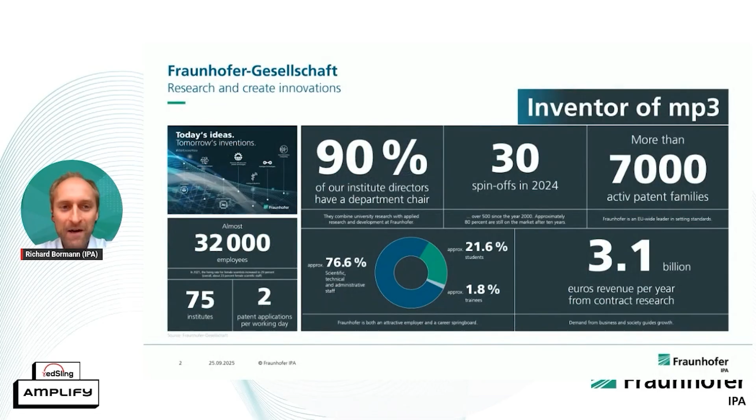We are happy to present our work on virtual feasibility assessment for bin picking today, which is a new paradigm in solving bin picking tasks. And before I really start with the topic, let's say a few words so that you have an idea what Fraunhofer IPA is about and Fraunhofer Gesellschaft as a whole organization is about.

So we are the biggest applied research organization in the world. To give you a better understanding what this means, just think about it: we are the inventor of MP3. This means we are taking new findings from science, from university, and transform this into new innovations that can go to market and help you to be better on the market, to have a better business, newer solutions, new innovations. So we take new findings from science and make it available to real business. This is our mission here.

There are about 32,000 employees in the world working for these goals in all aspects, not only robotics, that's what we do, but also IoT, life sciences, and every field of research and innovation you can think of. We have about 75 institutes in Germany and distributed all over the world, like subsidiaries in India, in Japan, in the US, also in Europe, in Austria and in Italy. So there are quite many places where you can get in contact with us. We are well known for having many patents, very successful spin-offs, and also a lot of revenues each year, 3.1 billion recently.

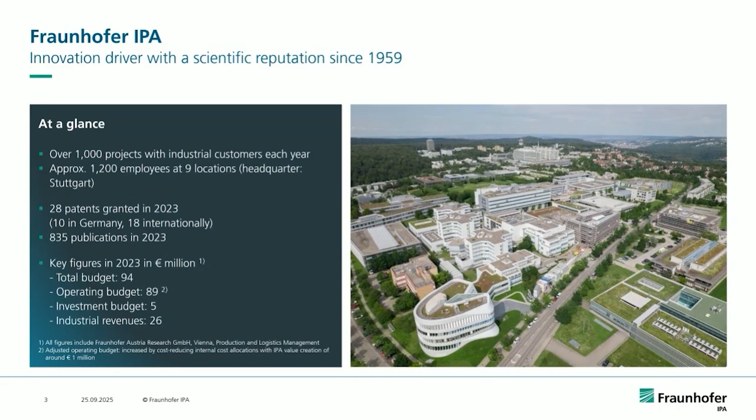Our institute, Fraunhofer IPA, is located in Stuttgart. We are, as said, 75 institutes distributed all over Germany and all over the world. In Stuttgart, we have 5 institutes, and IPA is one of them. We ourselves run about 1,000 projects each year with industrial customers and also research projects. We have 1,200 employees and a total budget of approximately 100 million euros per year.

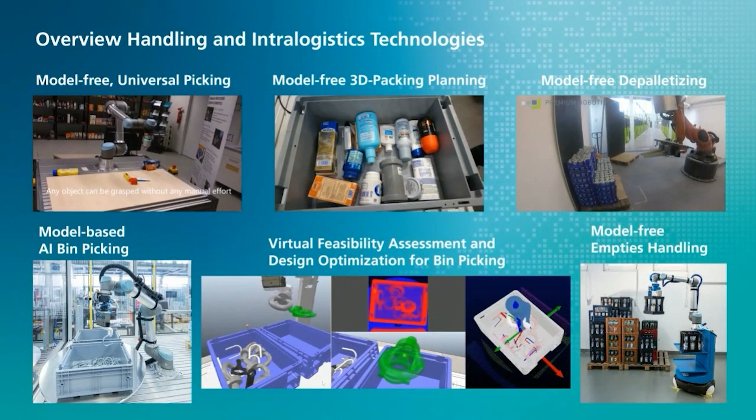Our robotics department is about 60 to 70 people working on different things. My team is working on handling operations with robotics, but we are also concerned with welding, assembly, safety for robots, robot systems integration, and all other topics relevant to real robotics operation in the real world for making business. But let's go to our team. We are 40 people working towards solutions with handling robotics. That means we have model-free and model-based picking and grasping operations with robotics. I will tell you more about the model-based approaches for bin picking in a few minutes.

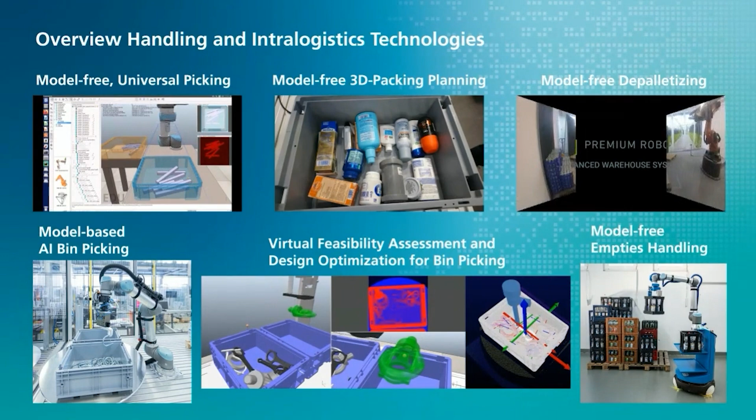But we are also concerned with packing planning, placing products in a nice arrangement into boxes, and palletizing and depalletizing, what you see in this video. I will skip the bin picking part because I will show you much more soon. We are also concerned with empties handling, for example, which is quite interesting in the countries where you have to deal with empties.

Furthermore, we are concerned with digitalization of products, so we can make very nice visualizations and scans of products, which help to run and train AI algorithms on object detection and further complex solutions. This yields scalable object detection solutions usable in order picking in warehouses, and solutions for mobile robotics that run in warehouses, as you see here, mobile robots that can pick up objects from shelves and store them in boxes for client orders.

We are also active in the field of laboratory robotics, as you can see on the bottom. So robots that retrieve chemicals from cupboards or that dose chemicals for their clients.

And last but not least, all these intelligent behaviors only work really well for you if the robots can smartly set them up themselves. So you might only show them in a very intuitive way, by teleoperation or by showing directly to the robot what to do, and the robot learns from your demonstration and does the real thing.

So we're also concerned with any kind of intelligent mobile manipulator, like humanoids and other kinds of mobile robots that can do useful jobs in your business or in your production, for example. Even these robots can utilize buttons, for example, and press buttons, just as an example.

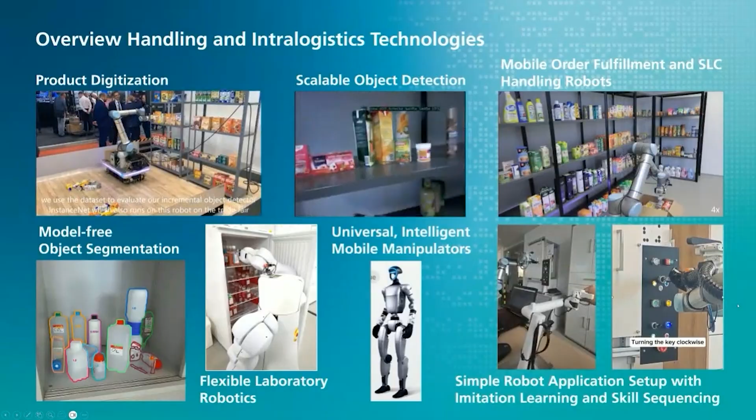All right, then let's get deep into the topic of today, which is bin picking. So bin picking itself is the process when you are served in your production, for example, with a box or a crate of parts that usually come in bulk, as you see in the videos on the right side. You don't know exactly how they are located. They are chaotically served. You have the goal to take them out one after the other from these boxes and put them in an arranged manner into some machine, for example.

So machine tending is one of the premier application cases for bin picking. You take out single parts and put them in an ordered manner into the machine so that the machine can do some useful job with these parts.

Yeah, and we have been working on this since 2003 approximately. I was not starting this, I was just jumping into the team. And we have had this in real operation in real industry for many years. I think our first installations were about 2010, 2011. So we were among the first in the world who really put real bin picking applications into real industrial operation.

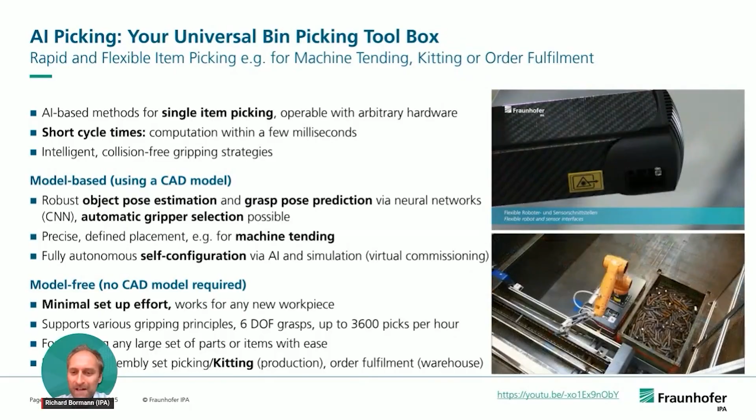And since then, we developed year by year many more nice functionalities, and I will show you a couple of them today. Most important to us is always to really serve the needs of the customer. That means our solutions are always tuned for short cycle times. We are very fast in computation, and we also consider the whole process.

In the end, it's also very important when gripping that we have an intelligent gripping strategy that doesn't collide with parts and does not collide with the rest of your environment, as you can also see in the videos. In the lower video, by the way, you also see that the robot can unload machines, as you just saw in the last seconds. This robot in the lower part is a real industrial installation running on 2 stations, serving the machine and unloading the machine.

I'm very unlucky that I cannot show more videos from real industry operation in automotive, etc. You know, they have NDAs and they don't really like others to see what's happening. But at least you get some idea, and the upper robot is a robot in our lab showing the recent technologies we do.

So altogether, to give you some overview of how bin picking works, you might have seen this in the real world before. Bin picking can be divided into 2 major approaches. The first is model-based bin picking. That means you have a CAD model of the parts that you want to separate. This is usually the case when you are in machine tending and you need a very precise placement of the parts into the machine.

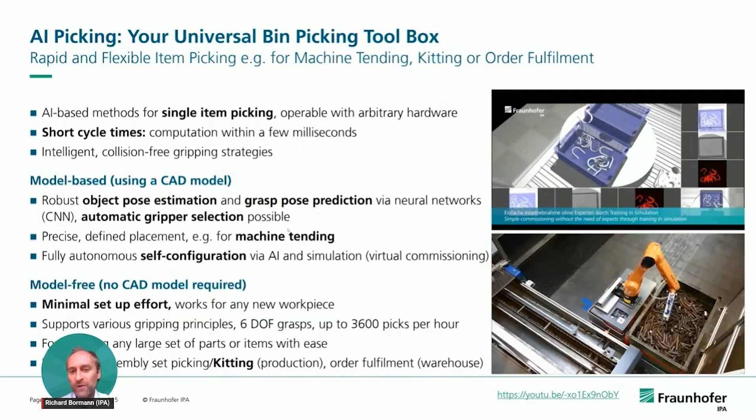There we serve you with robust object pose estimation, automatic grasp pose prediction, and automatic gripper selection, even if you have different grippers for taking your parts out of the boxes, and a fully automatic self-configuration. I will show you a little bit more about this. So this is the machine tending part, where you usually have model knowledge.

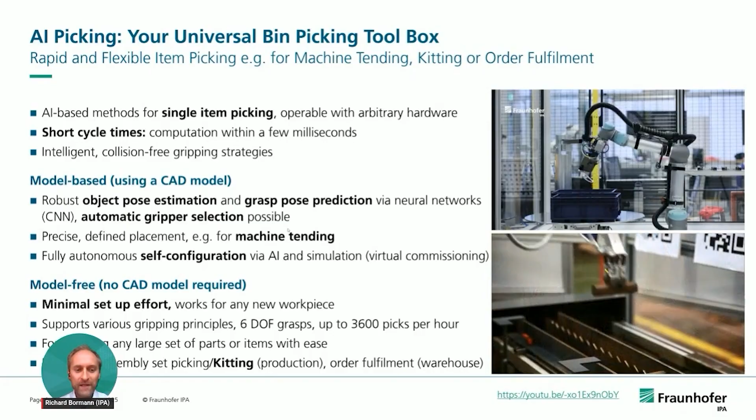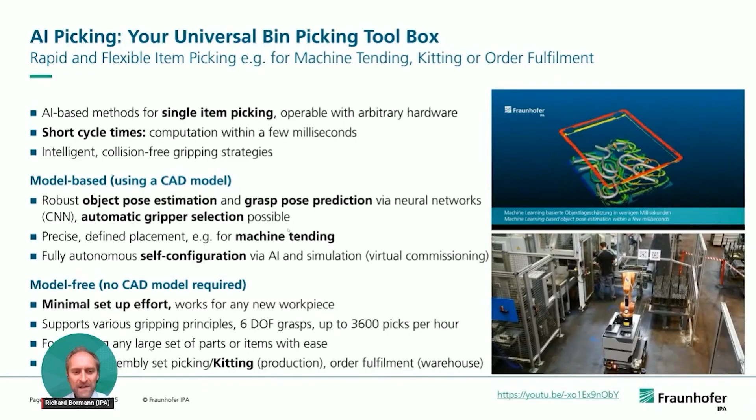If you don't have model knowledge, like in warehouses, or when you do kitting, like pre-order picking or assembly set kitting in a manufacturing environment, then of course you have thousands or tens of thousands of parts, and you might not have models of all of them, or you might not want to set up a system for all of them. In this case, you start working with model-free approaches that do not require any training and can just work with any new part coming to you.

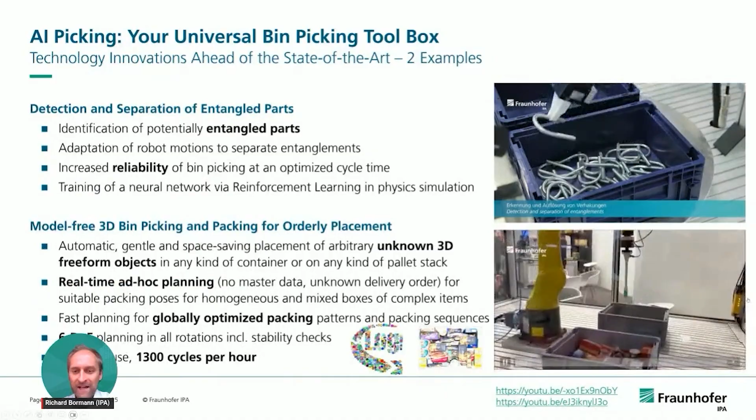This is what you see in the lower part of this slide, and also in the video on the right side. There's a robot used for order picking, and by the way, it's very fast. This is live speed, it's not accelerated. This robot is supposed to pick the right objects from a source tote into a client tote, where you really assemble some kind of client order.

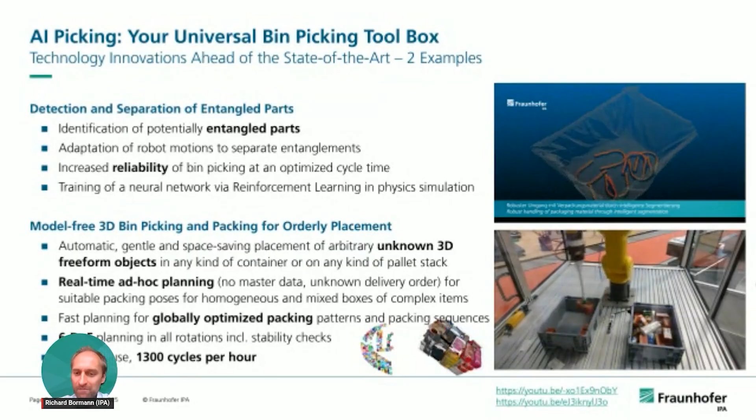And the big idea here is that we not only in a model-free fashion take out the objects from the source box and drop them very randomly in the target box, but we are here concerned with a model-free placement algorithm that is also scanning these objects in the process, as you can see here with the camera in the middle, and also scanning the target box where there is space for exactly this geometry of the object, so that we can end up with a very tightly packed target box that you can directly ship to the client

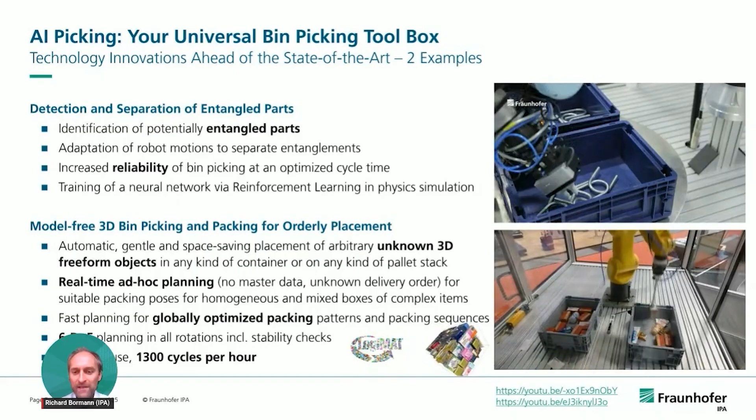because it's very densely packed. And all of this happens on the fly, ad hoc, within 50 milliseconds. So we don't know what comes to the system, but in 50 milliseconds, we decide where to put it in the target box, get a nice and dense arrangement of the parts.

If we have some model knowledge in this process, because we have cameras in the process, we could scan the model from some sides, create a 3D model. We can even plan ahead. This is what you can see in the very small videos below. Planning ahead means we can already tell you in a few seconds how a tote box looks like for you when you want to pack a certain set of objects in a very dense manner into a box.

And as you can see, this is super fast, below 3 seconds cycle time with a gentle placement, and a lot of opportunities that you have own packing rules, for example. So this system is super versatile and already in successful operation with several clients in the market.

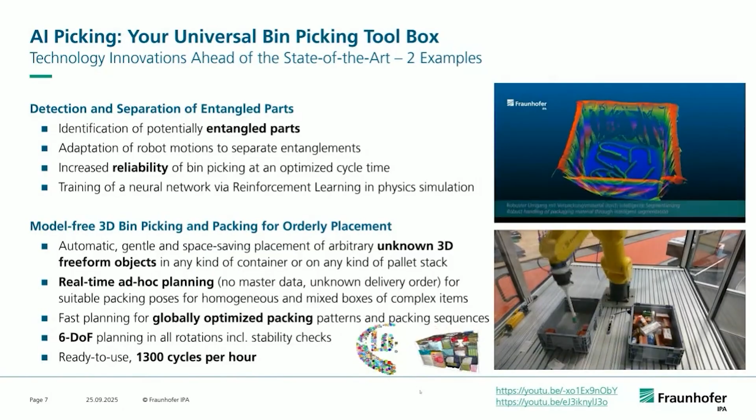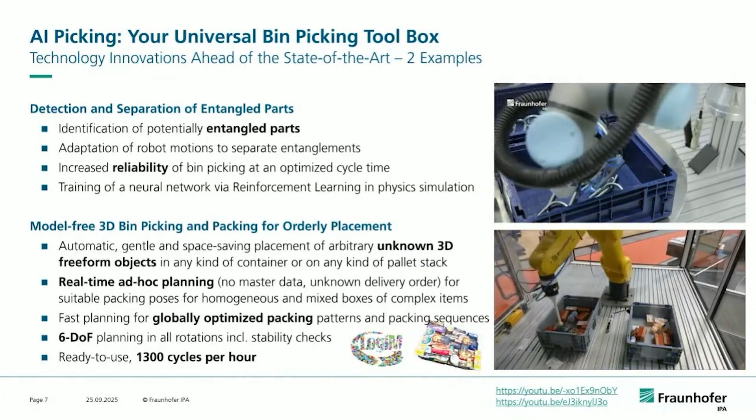The upper part just gives you another glimpse on new technologies available with our model-based bin picking solution, which is on the one hand handling entangled parts. So when you want to take out parts of a box, you might face the problem that these objects might entangle. So if you just lift up such parts, you might take out not only one but multiple parts, which is not what you really want to have in your machine. And so we have a detection algorithm that sees this part is prone to an entanglement, and the path planning algorithm that is really taking a new path so that the part disentangles.

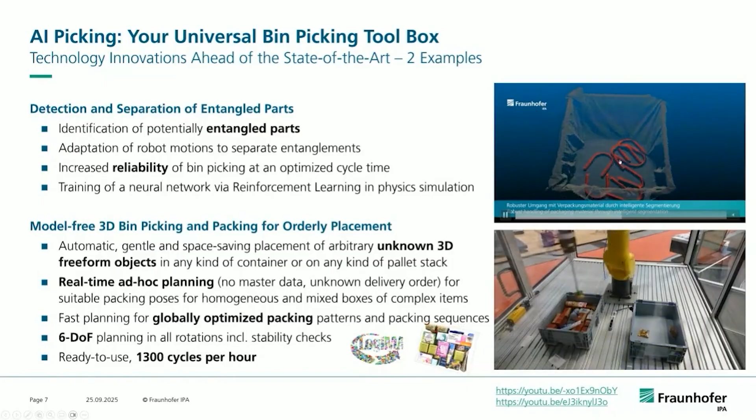And as another intuitive and innovative technology, we have this one, what you see here in this video, which means you often see parts shipped in boxes with some additional foil inside, and we can detect this foil, segment it out, so that we are only remaining with the 3D data of our parts that we really want to retrieve from the box. So these are all technologies that help you to have a more robust bin picking solution in the end, and succeed in having a continuous operation with high performance in your applications.

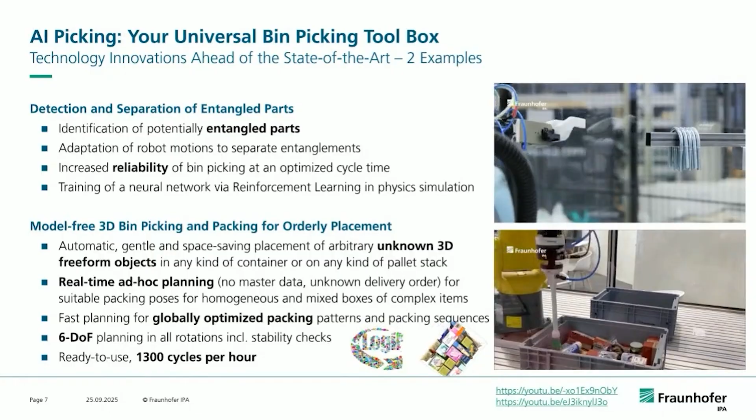But nevertheless, before you really get there to have a bin picking application which is successful in your production, for example, you often face the problem that you have to invest in such a solution. And if you invest some money into it, you have to have confidence in investing this money in a solution that will really work for you in the way you want to have it. So the typical problem we see is many people are interested in running bin picking applications, but they have to be brave enough to invest their money.

And in the beginning, you cannot do much more than taking the parts of a client to some suboptimal robot system in the lab, where you do some bin picking tests with it for some days. You get a feeling it's working pretty well, but you can never fully guarantee how it's working because you're quite limited in the time you can invest in such a feasibility study with a real robot, which is, by the way, still not the optimal solution that will be served to you in the end. So you don't really know how the final system will perform when it's installed at your site.

And to really break this problem, we have created a simulation, a physics-based simulation of the bin picking process that is really telling you the physics of the retrieval of parts from boxes. And this means you can use different grippers, as you can see in the lower video already. You can use, for example, 2-finger grippers, vacuum grippers and others to simulate the process of retrieving parts.

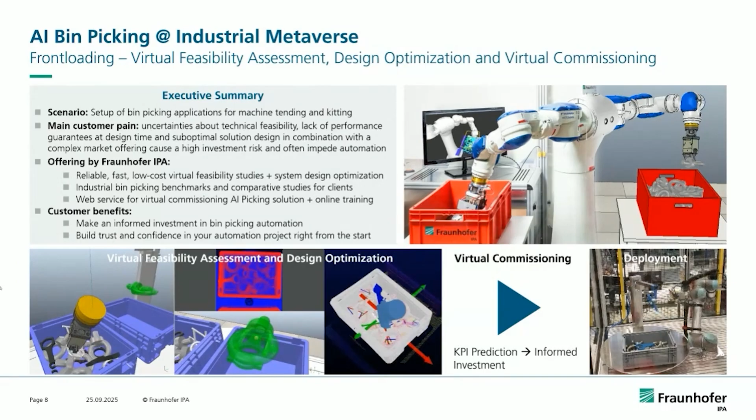So first of all, our bin picking system helps the customer a lot by having plenty of opportunities for self-configuration. So in the best case, you only set up your environment as a digital twin, and the system totally sets up itself, meaning it tunes its own parameters for the detection algorithms. It is automatically detecting grasp poses on the object.

So this is what you see here in the upper part: you just upload a model of the object you want to pick up, but you don't tediously have to define, I can pick it up from here and from there with the gripper I want to use. The system is totally by itself analyzing how this works. That's what you can see in these videos, like for a 2-finger gripper or for a vacuum gripper.

The system totally by itself defines where good pickup points are for these objects, which is very good, because in the end this means setting up the system is much simpler. So you don't need expert knowledge, no real data for setting it up, and of course no tedious annotation of real data to get these systems trained for your application. This makes it very easy for you to set it up.

And as a byproduct, but a very valuable byproduct, you can also conduct virtual feasibility studies with this physical simulation that is also used for setting up the system. So most importantly, it gives you the opportunity, without investing money into any hardware, to really test the solution you might run in your production by having plenty of simulations run and analyzing what comes out of it.

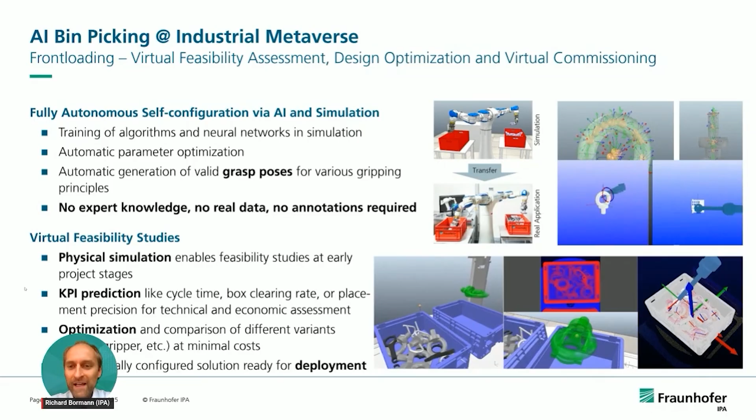You can just set up new parts totally in simulation, turn it over to the real machine, and the deployment really enables the machine to immediately start working with new parts. So no off time in your production when you want to change to new parts, which is very, very useful.

So you have a lot of customization of really building up a digital twin of what your system shall look like in the end and what your environment and boundary conditions are looking like. And once this is ready, you can just start setting up the system, doing a virtual feasibility analysis. And our backend is running these kinds of simulations with your parts then.

And after a time of calculation and simulating and analysis, you will be faced with the KPIs predicted for this setup with your parts. And you can think about, is this technically feasible? Is this economically feasible with the performance I get out of this forecast?

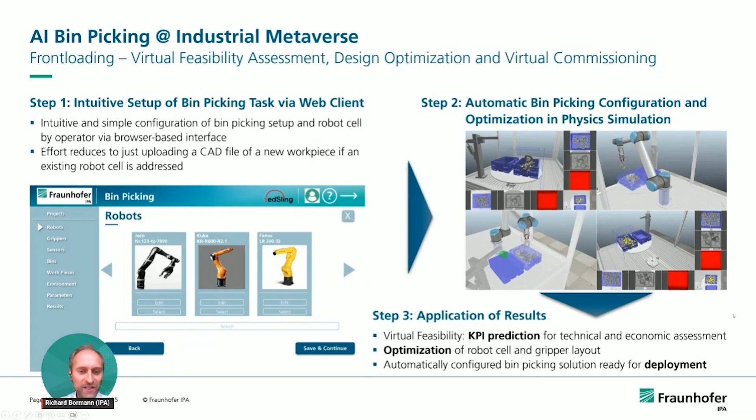And of course, if you're not happy yet, go into the optimization loop, have the system optimize your system for the robot cell and for the gripper layout, and in the end, be ready to deploy the thing on the real machine that you can build up with this competence and confidence.

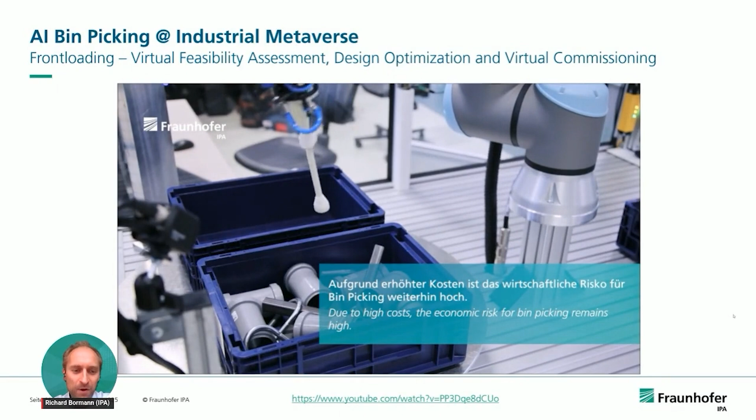Okay, just quickly see this in real. This is our robot in the lab, retrieving parts from homogeneous and mixed boxes, as you can see here, with vacuum grippers or with 2-finger grippers. And this is how you use the system. So we have user management in our web-based client that we developed together with edSling, where you can select, for example, the robot and so on. As I said, Daniel will show you more in a second.

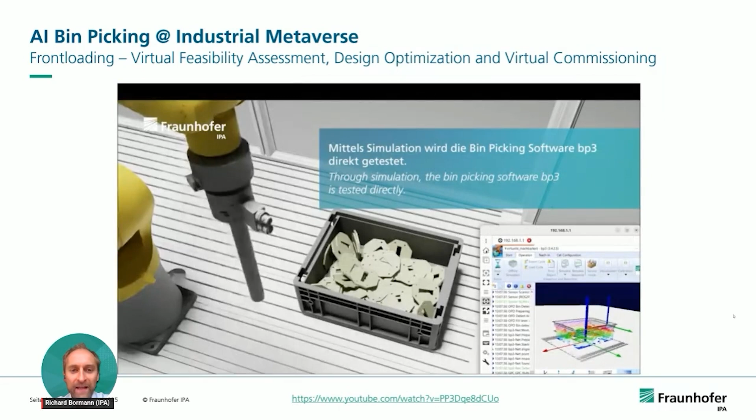In the end, you can rearrange all the objects in a 3D viewer to put this together into the real setup that you want to run here in the simulation. So everything's super easy and intuitive. And this is fully connected to our software called BP3. This is our bin picking solution.

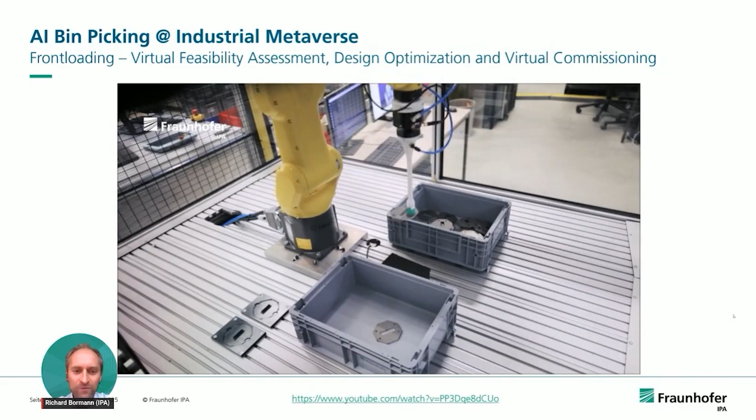Cloning the whole setup that you set up in the web client to a real simulation that you can see here. This is our simulation of the robot system, conducting retrieval operations and analyzing how well it performs. And once it performs well, you can just put this on the real robot. As you can see here, this is the deployment on the real robot, and it directly conducts what you have trained to it in simulation.

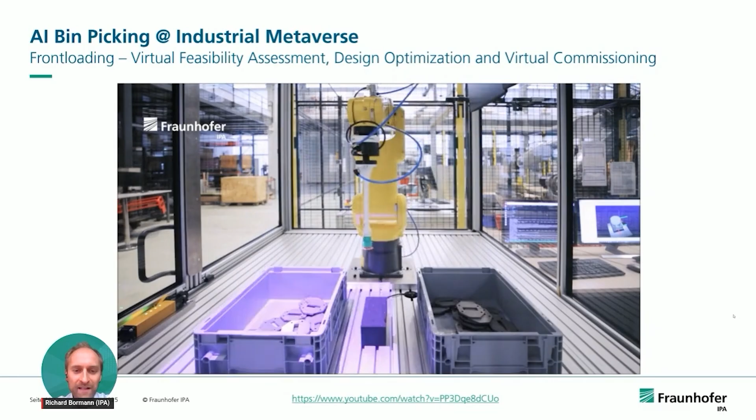So just for you to understand, the whole thing is built up very modular. So this means we don't only have a very modular and nice to use web server for the user interface, where you can interact with the system in a very easy way. So without big training, even a standard user, a standard worker can use this. Everybody who can operate a tablet PC or a cell phone is capable of using the system.

So you can set it up there, and it's connected to a high-level process controller that is operating the whole procedure here for training and for operation. And we have separated the whole thing from the real robot skill controller. So that means the AI bin picking solution or other solutions from other vendors are totally out of the loop here as a single module with a standard API interface.

So you can just put in not only our solution, you can also put in other solutions and compare different solutions with our virtual testing environment. Because of course, in the end, there are many bin picking solutions on the market, and one fits better for one problem, one is better suited for another challenge. So in the end, our simulation even enables you to compare different solutions here.

And then we connect to our simulation server, which is running the physical process simulation on the one hand, and also keeping all the data, knowledge and models here. It's like the simulation data, configuration data, the KPIs you record during the tests, and the trained models in the end that you can finally deploy to the real robot system, so that it directly runs there.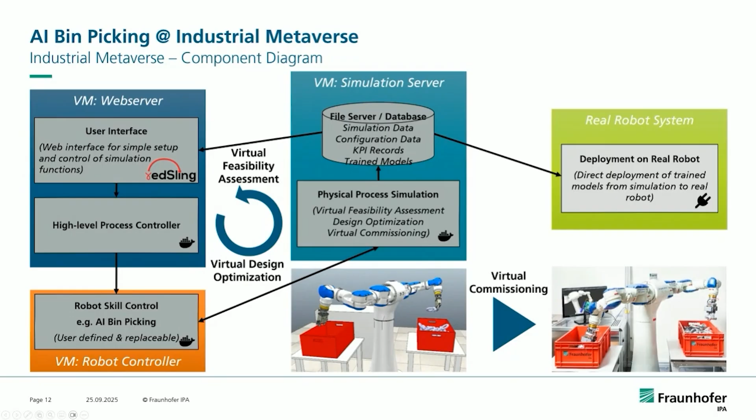So this is all modularized so that you can really work with this in a very flexible fashion. And as said, the whole thing can loop in different optimization cycles so that in the end you also optimize the design of your solution here.

So last but not least, it also gives you a hands-on benefit if you go this way, because in classic bin picking systems, whatever advertising says, in reality, you always need at least 1 hour of expert knowledge until you really feel safe in operating the system. Because at least if you just set up one grasping point, this might take you 1 minute.

But if you have to set up 30 grasping points because you want to really take out every object out of your bins, then this already takes you 30 minutes, and so on and so on. So in the end, if you have this self-configuration system like we have here, you save a lot of time.

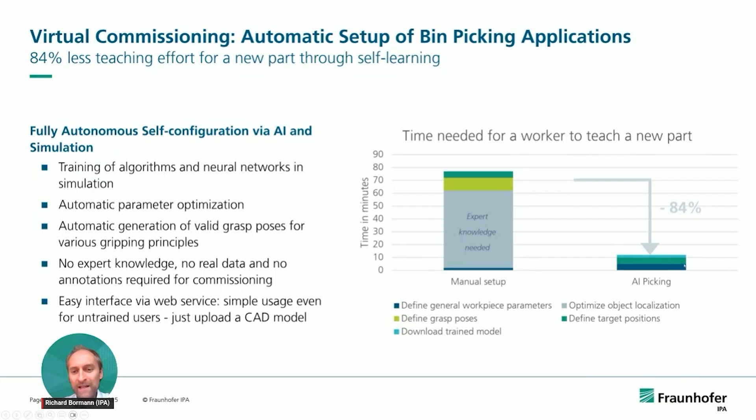It's like about 84%. And of course, it's not only time savings, most importantly, you save a lot of expert knowledge time. So you don't need an expert for setting up the system. The system itself is the expert. And this is your real benefit here, because the expert is super expensive, whereas time of just waiting a few minutes while the computer runs some computation and sets up your system is much easier to tolerate and much better for your business as well.

Coming to business, just as one of our very happy customers and collaborators, I would just tell that we are working together with Liebherr-Verzahntechnik since 2010, 2011 in a very tight way. So they are one of our systems integrators that bought the software from us, that are working with us for a long time, have served many clients, and their clients are super happy with the solution.

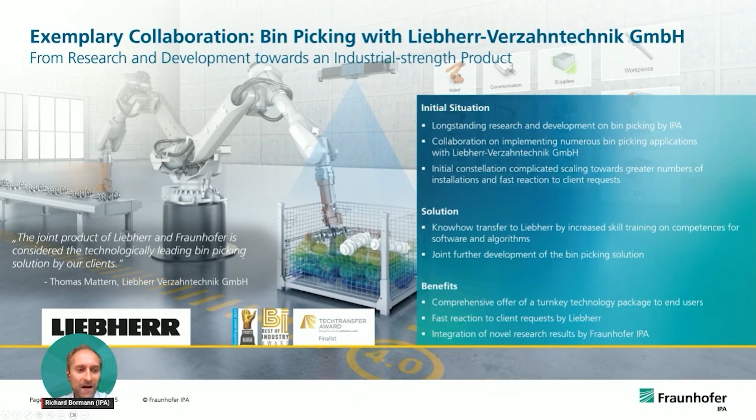One of them even said this joint product of them and us is technology leading in the market. So just to give you some idea that we're working here really upfront of technology. And we also got some awards for this work together, which was really recognized well by industry.

Okay, just to wrap it up, we have many intuitive and innovative technologies in this system, and we are day by day working on more improvements and newer technologies. So stay tuned for what we have next for you in the next month. But just to wrap it up, we have simulation-based training, we have automatic grasp pose definition, segmentation of any packaging materials or whatever might be in the box, so that you can just work with the real parts in your sensor data. We have AI-based, very fast detection of objects in the box.

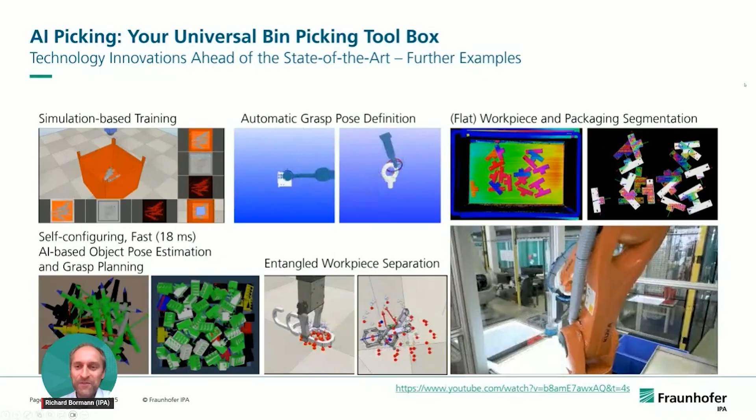We have disentanglement functions. We can work with flat workpieces. So just to name a few things that we already can do with the system, and we will be capable of doing more every year. So this is a system really upfront at state of the art. So finally, because we are always asked, what is the USP of your solution? What is the advantage of using this?

Our physical simulation, on the one hand, as shown, helps you to simulate all handling and grasping processes. And just to underline, this is not a 3D visualization of the process, it's a real physical simulation of the grasping processes. Don't mix it up. Other vendors show you a 3D visualization.

You can think about cycle times from this, but you don't know whether physically the grasping process will work or not, and whether your bins will be emptied in the end or not. This is only possible with real physical simulation that we do here. So this is giving you really meaningful forecasts for your KPIs before you really invest in such an automation project.

The automatic setup that we can give you really opens up new opportunities, because when it sets itself up, you can easily put in thousands of parts, because now you can really scale up bin picking with many different parts, or you can change your parts on a daily basis, which was really a hard thing before. With current systems, you take maybe a half day of setting this up, and after a half day you don't care anymore because you have the next part already, the next half of the day.

So with this system, you set it up quickly and you can really switch from part to part in a very fast fashion. The whole thing is super easy to use. Daniel will show you next. So even unskilled workers can set up new parts in your robot system. If you have to switch between parts very quickly, even your shop floor workers can set up a new part easily. We are, as Fraunhofer and also in our solutions, very agile and adaptive.

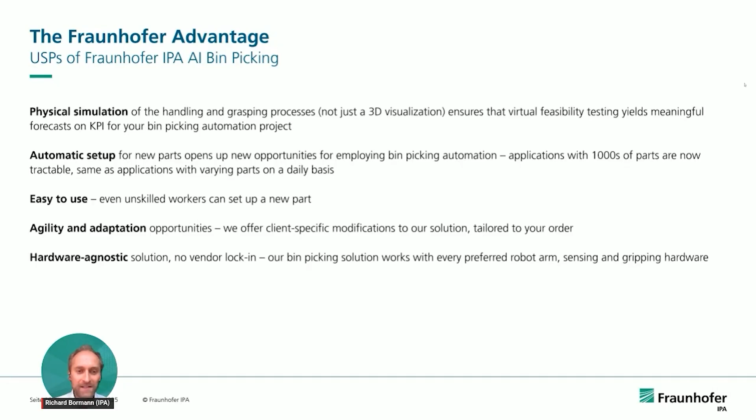And in the end, we are hardware agnostic. So it means you don't have a hardware vendor lock-in. We can work with any robot arm dealer, with any make of robot gripper, with any make of sensor. We give you information on what is suited for your parts and what is maybe not good enough, but in the end, you decide which hardware is your focus.